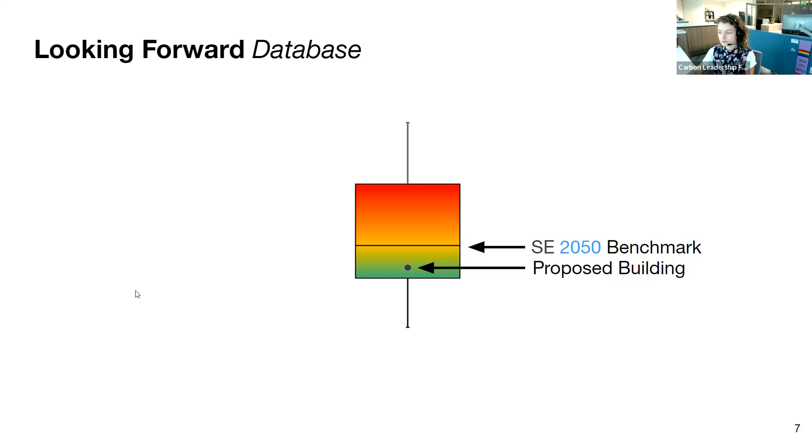As structural designers, we have an understanding of how factors such as seismic design category, soil bearing pressure, and risk category can influence the cost of a structure, but these factors also can impact embodied carbon. So to make a successful comparison, we need to be gathering all of this data. We also need to know how our buildings are performing to keep us on track for net zero. So as we start to accumulate more data, trends can start to be spotted.

For example, we can put together an ideal range of embodied carbon for timber versus concrete structures of the same scale. And before SE2050, there was no equivalent database that tracked structural embodied carbon or any of this information. And we're actively working to fill this void by collecting the data to better inform our industry in these critical next few decades.

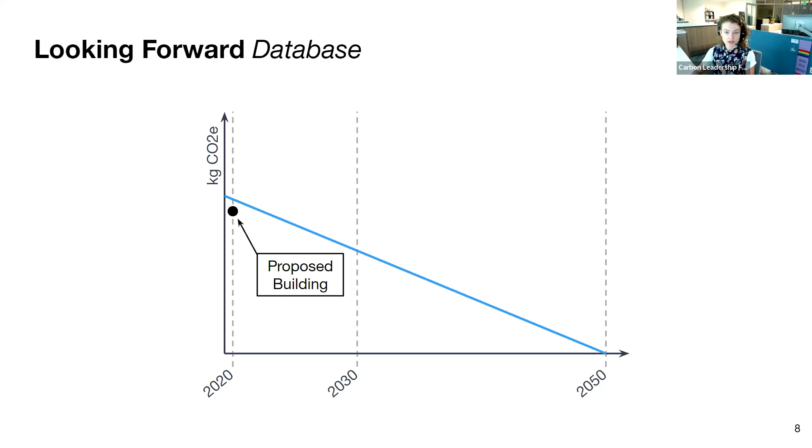So in conclusion, from the data that we've collected so far, it is too early to draw any conclusions from that data. There's a high amount of variability for two major reasons. First, there's variability because there's no LCA methodology standardization. And second, there's variability because even in similar buildings, we can have wildly different structural designs. And so our priority moving forward is collecting more high quality data, more data period, and creating a standardized LCA procedure.

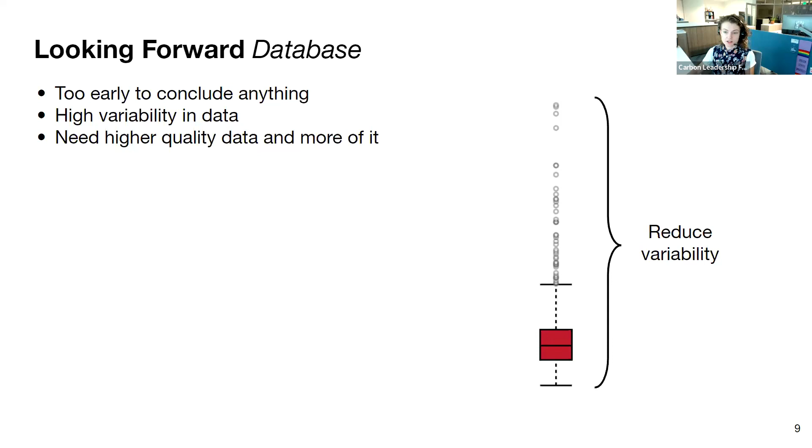In order to reach our goal by 2050, we need to start ramping those program requirements up. And this is going to be a challenging process. It's going to occur gradually, but we've been working to make this process as easy as possible for signatories. And this includes, we drafted a pathway to zero this past year, and we're going to be implementing those changes to our requirements in the near future, coupled with resources to support firms as they continue that journey.

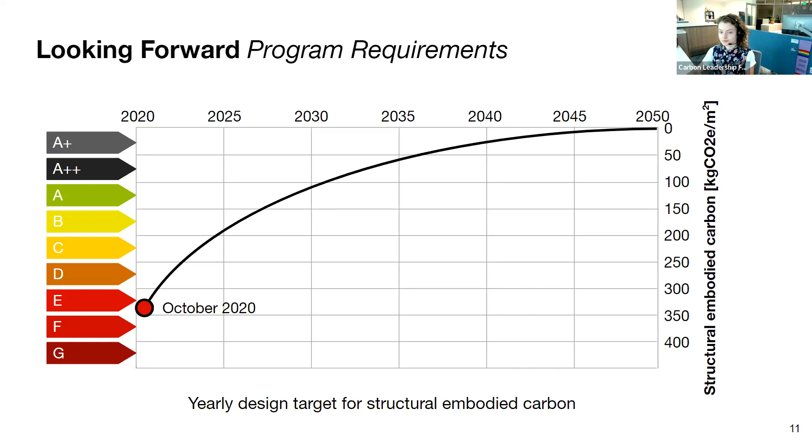And to close, I'm just going to go over looking forward, generally speaking, for the program as a whole. In January, we performed a detailed planning session as a team, and we determined that the following new programs are going to be incorporated into our work as a component of supporting the firms, as I was discussing under program mechanics. And this includes a recognition program to aid in the formation of a community by increasing the visibility and awareness of other firms that are working on the program with you, and through the creation of a little friendly competition. This also includes a mentorship program with the hope of facilitating communication, resource sharing, and general support between participants.

And then expanding educational outreach by doing seminars such as these, to be able to talk to people directly and answer their questions, as well as educational outreach in the form of different kinds of documents. Specifically, we identified the need for guidance on structural material quantities and LCA methodologies.

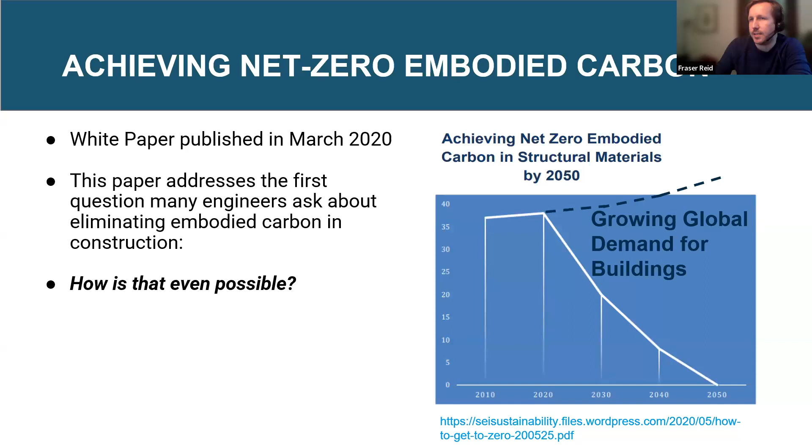So introduction: this is a white paper that's also available on the website, but as Annabelle explained, the mission of SE2050 is to provide a pathway towards net zero embodied carbon emissions in structures by 2050. And the most common question there is, how is that even possible? Because fundamentally, structures have a lot of materials. Current methods of manufacturing require extraction of virgin materials, and emissions are just part of the process. So how is this even possible? There's also a growing demand for buildings. So wherever we stand now is projected to increase over time.

But ultimately, so this is Mark Webster's white paper. Ultimately, there are 4 different tracks that are necessary to eliminate embodied carbon in structural systems. The first is the design track, and that's really what I'm focused on today, the way that we design structures. So being lean, reducing our demand for materials in the first place, is the first track. That's the blue one. Then the orange is basically a clean electrical grid. So how materials are manufactured, less reliance on fossil fuels, and more reliance on green energy and electrical production.

The third track is material production. So basically cleaning up the way that materials are produced, period. So there's all sorts of research going into different structural materials, concrete, steel, timber, from a material standpoint.

The SE2050 website does also have specification guidance for structural engineers. So once you've determined you need a certain amount of materials, how to manufacture the materials that you do need as carbon efficiently as possible. And then the last track is the offsets track. So carbon emissions are part of the game with material production. So basically reducing those insofar as possible and offsetting the remainder is really how to get there.

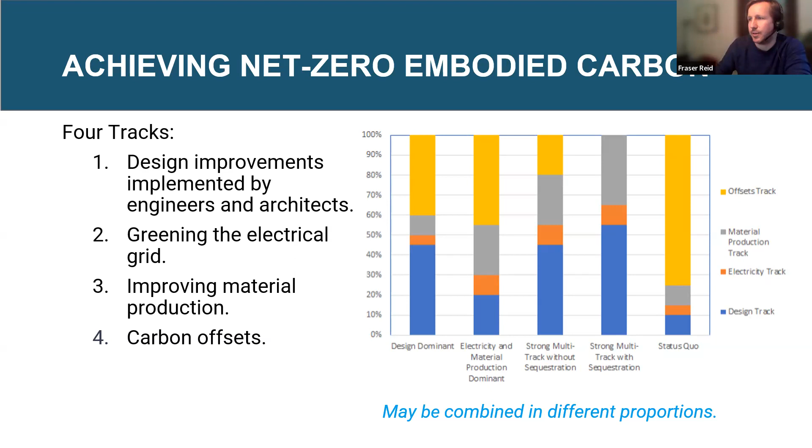Just back to SE2050, similar to what Annabel was describing. It's a two-way commitment, and our commitment to the industry is to provide the resources and support to the profession. So again, this is just a new resource that's available on the website. When you go to the SE2050 website, Swarna is actually one of our key people for organizing the website content. At the moment, there's a number of splash pages. The design guidance currently lives in the structural materials strategy, but this is being reorganized at the moment. But if you visit our website, this is what you will see.

And this is the new design guidance page, and I have a little video here that just shows you how it's organized. So it's a lot of written content at the moment, which I hope we can improve over time and maybe have more pictures and diagrams elaborating on the written content. So we're calling this design guidance volume 1.0 with the goal of improving it over time. And I'm very much an advocate for something is better than nothing.

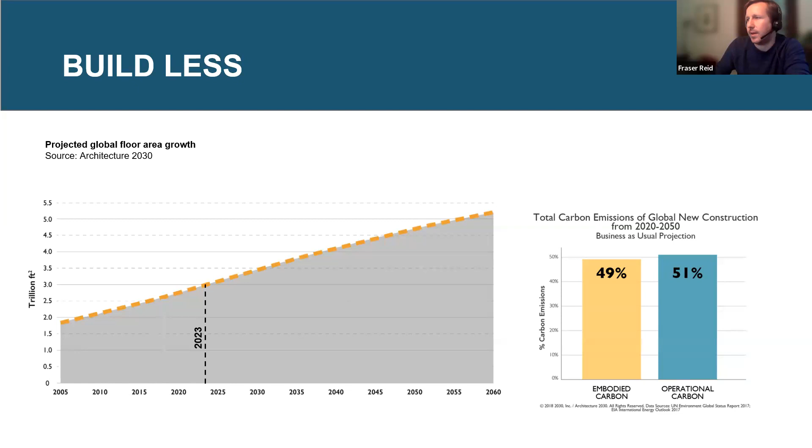This is projected global floor area growth that you may recognize, but we are building effectively a new New York City in the world every month for the next 30 years. That's just based on population growth and business as usual projections for new construction. And if you project embodied and operational emissions, embodied carbon through 2050 is projected to contribute approximately half of industry emissions. So a new New York City every month for the next 30 years. Let that sink in.

What's our role as designers? Very often we're given a brief and we feel kind of helpless to challenge that brief, but there are moments, and the more we as an industry advocate for building reuse, I think the more impact we can have collectively.

So what is the most impactful way we can build less? It's to use the existing built assets that already exist. Next time you're on a project and the brief is to demolish something that's already there and rebuild, challenge that decision.

It may range from something very small to something very large. In this instance, this is one of our projects in Detroit, which is an existing building. Sometimes these, I think this is an example of it—it's sort of a hypothetical comparison. Up top is basically a hypothetical scenario. In this instance, the client had no intention to demolish and rebuild the building, but I think it's important for illustrating the impact of building reuse.

These are carbon avoided assessments. There's also the CARE tool that was recently released, open source, that you may be familiar with, which aims to do this as well—to provide very high level carbon avoided assessments for retrofit scenarios.

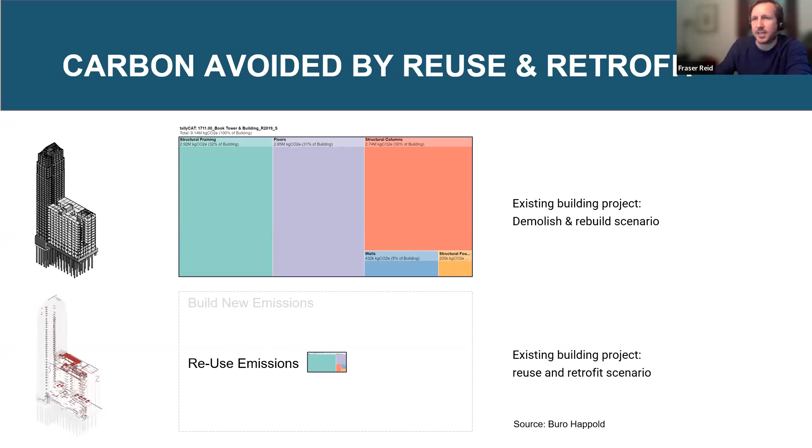And then below, it just shows you, with this particular project, from our Revit model, the interventions that were made to enable this building to be reused, and the embodied emissions just based on the amount of stuff that's required to get there—a fraction of the demolish and rebuild scenario. So presenting metrics like this in a simplistic and digestible way to clients, and doing this collectively in the industry, is important.

Build smart. So this is early on in design, and as this graph illustrates, the time-dependent nature of decisions. What are the decisions you're making right up front in the project? Well, I mentioned, do we build at all?

Can we reuse what's already there? The impact of that level of decision making just eclipses the impact you can have once these decisions have already been made. Once you've got to build new a certain amount of program and floor area, well, it's going to take a certain amount of embodied carbon to get there.

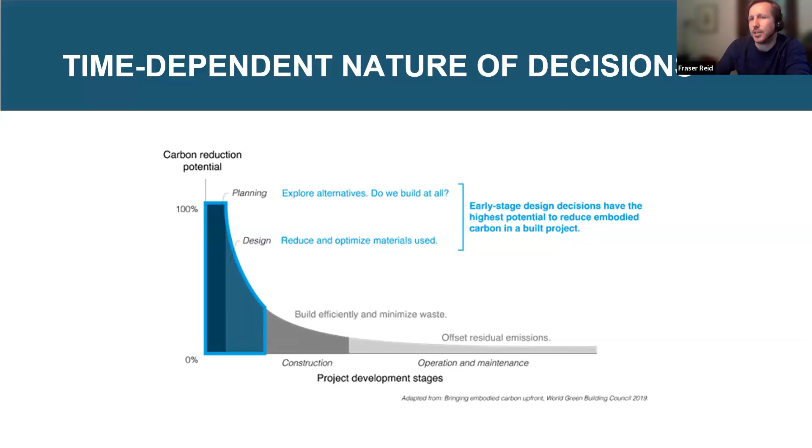But as I'll illustrate with some of these other early decision-making topics, there's a lot more you can do, should you recognize that new build is necessary for your project.

One of the most carbon intensive types of structures are deep basement structures. There's a lot of concrete that often goes in the ground in foundations and substructure. Basically, it's somewhat exponential—the deeper you go with basement structures, the bigger everything needs to get, based primarily on hydrostatic pressures.

It's linear with depth, and so there's a huge difference between a 3-story basement versus a 2, and again a huge difference between a 2 versus a 1.

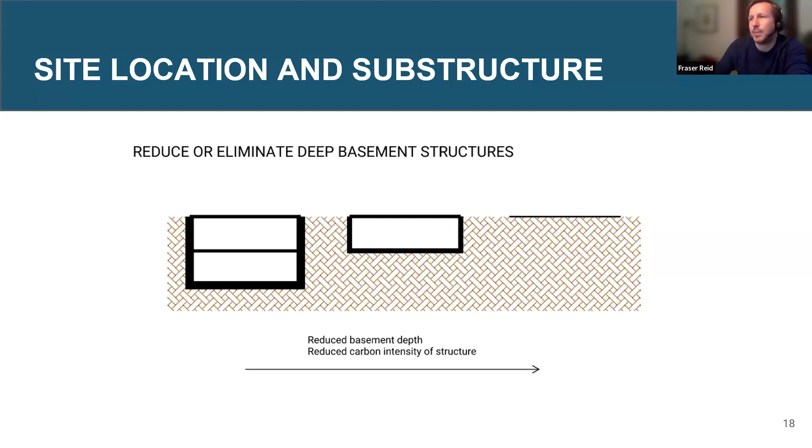So can we reduce or eliminate the need for deep basement structures? Think about this as value for money—but think about it as value for carbon. You're getting a certain amount of square footage at your B2 level, but you're paying so much more in carbon to get there. So think about where you put your building on your site, and whether the demand for basement structures can be reduced.

Ground floor advantage. So this is about where you're going to put your stuff. You've got a swimming pool that needs to go in the building, or a bunch of MRI machines or vibration sensitive equipment—where are you going to put that? Well, with the heavily loaded stuff, basically the lower you can put it in your building, the more efficient it's going to be for structure.

Obviously it's the columns that are supporting—imagine your rooftop swimming pool—it's your columns and vertical structure, but it's also a huge impact on your lateral system, which is basically all the stuff resisting earthquake loads, because heavy loads basically mean high earthquake loads. Your bracing, walls and foundations to support the building laterally can be reduced significantly by placing your heaviest loads near the bottom of the building.

With vibration sensitive equipment, basically, if you do have highly sensitive equipment, putting those directly on ground is the best way to go, because the structure required to elevate highly sensitive equipment just ends up being low value for carbon.

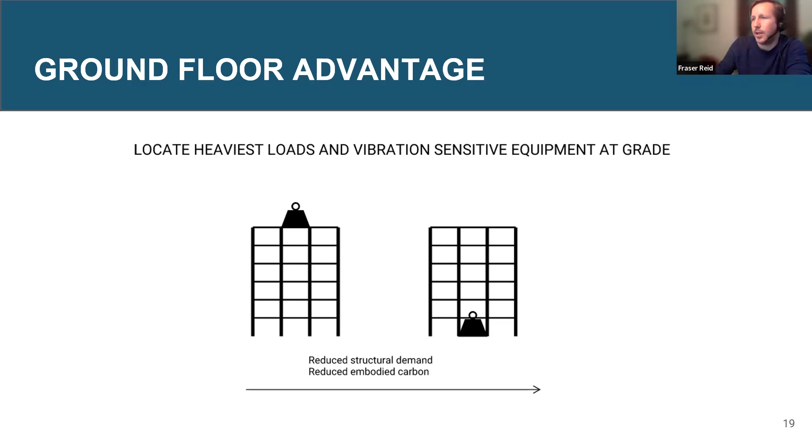Floor bay studies. So usually when you're working with your structural engineer, what you'll see coming out at SD stage is some initial bay studies. We're comparing different structural systems, we're comparing different materials. This is, again, getting this right early on in your project.

Carbon's really just another metric, right? We're used to comparing structural systems in terms of cost, constructability, speed of construction, all considerations that aren't going away and still are important to our clients, but using carbon as a metric to compare different structural systems as you're conducting bay studies. So conduct those bay studies, don't jump to conclusions during early design, and communicate the findings as it relates to carbon.

There's no one answer about always using this system. I think the key thing is to evaluate based on your expected span conditions, etc., different system options, and compare them in terms of embodied carbon.

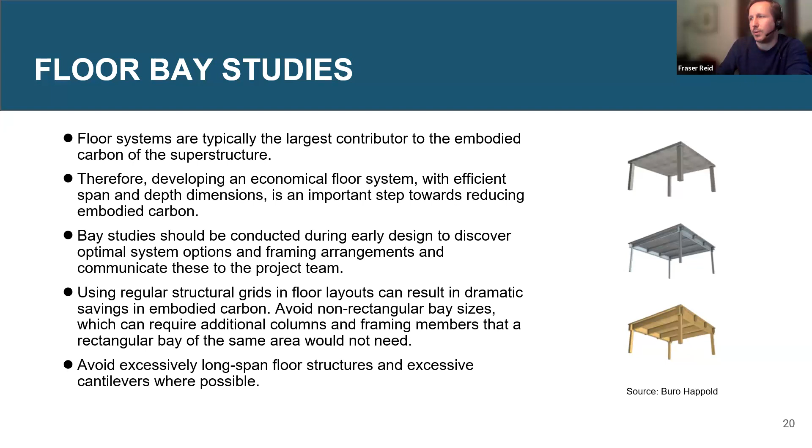As a rule of thumb, typically lower span dimensions will give you a reduced embodied carbon intensity of your structure. There's also other rules, like using regular structural grids and avoiding lots of irregular grids, and also avoiding excessively long spans. Long span structures are typically a lot more carbon intensive, same for excessive cantilevers. Small amounts of cantilevers can actually be fairly efficient for structure, typically up to about a quarter of the backspan dimension.

Consider composite and hybrid floor systems. Composite floors are traditionally concrete formed on steel framing, but composite floors can exist between any two materials. The reason composite floor systems are more carbon efficient than non-composite systems is the interconnectivity between the framing and the floor deck. Basically, they act together, and that helps you reduce the weight of your framing.

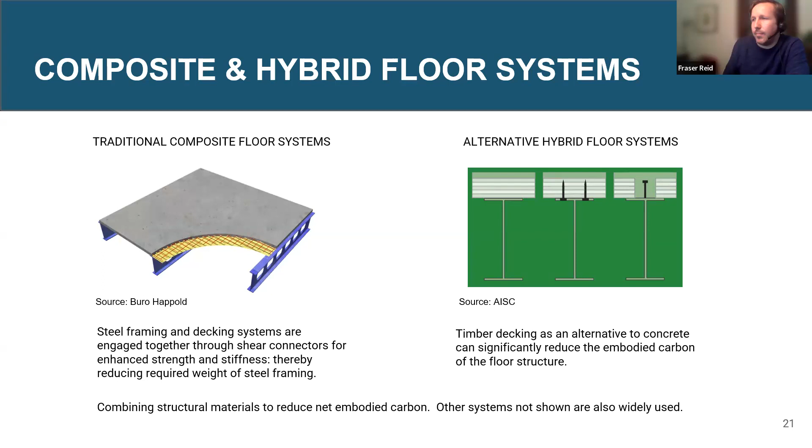Alternative hybrid floor systems - the American Institute of Steel Construction just released a new design guide for hybrid timber floor systems on steel framing. There's so much carbon typically locked up into the floor deck of structures, that if we can use timber as an alternate to concrete for floor systems, then we can go a long way to reducing embodied carbon of structure.

Prefabrication and offsite construction. As when you see some of these design guidance items, when you're conducting your life cycle assessment and you're really evaluating how much material do I have, and what's the carbon factor from the EPD that I'm using to get to the whole carbon value.

This is an example of where you don't necessarily get the reward for using a higher level of prefabrication, because typically it's a similar amount of stuff, but the benefits of prefabrication are some of the hidden benefits, because the processing of these materials - the more you can construct in factories, the less site waste you have.

Sorry, where I am, there's a thunderstorm happening, so apologies if I get cut off.

So prefabrication, lots of benefits - reducing waste, just less demand for materials, lower site emissions, and also more easily deconstructible, as well as other benefits to contractors and owners, like higher levels of tolerance and faster construction.

This particular system is a CREE system, which is prefabricated timber. You see there, the columns are constructed as part of the facade panel, so it's all kind of one piece. This is a system that we've used in our Europe offices that we're trying to bring over to the States.

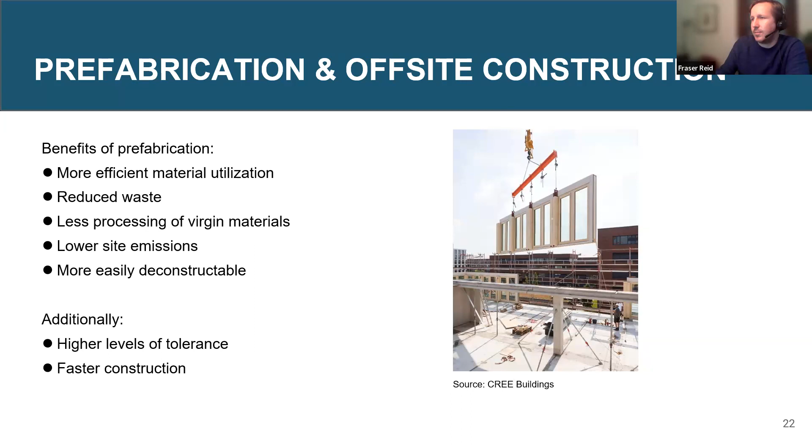Some recommendations as it relates to coordination. Avoiding - you're not always able to eliminate these types of things, but at least considering them during design and recognizing the carbon impact of some of these, so inefficient load paths, staggered column plans requiring lots of transfers, for multi-story buildings.

This is sort of good design practice illustrating that you can reduce embodied carbon through good design practice. So orienting your cores and considering how your MEP services are getting in and out, so you don't need to kind of brute force your lateral system.

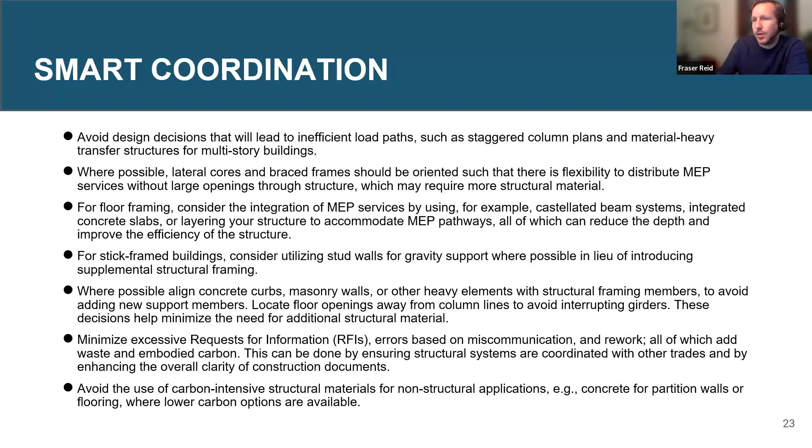For floor framing, castellated - integrating your MEP into your floor framing gives you additional depth on structure, so you can be more efficient with structure and more efficient overall. If you've got a stick-built system, not just using your stick-built elements for walls, but also utilizing them for gravity support, and some other suggestions there.

Now getting into some maybe nerdier structural topics - this is guidance for the processes we typically go through as structural engineers to address these topics, because ultimately we have minimum code requirements which need to be met.

But more often than not, there are also other considerations that go into how we design and size structural members.

Evaluate your loading criteria, using minimum code requirements where you can. Often on projects there are custom loads stipulated by the client - for example, wanting a 250 PSF lab floor so they can put heavy lab equipment wherever they want in the future.

So interrogate those criteria, because it really is pretty linear. If you've got a 250 PSF live load versus a 50 PSF live load, you still have other structural loads to consider, but you're going to need 3 or 4 times as much structure to get there.

So communicate that to your client and help them understand the impact of custom loading requirements as it relates to carbon.

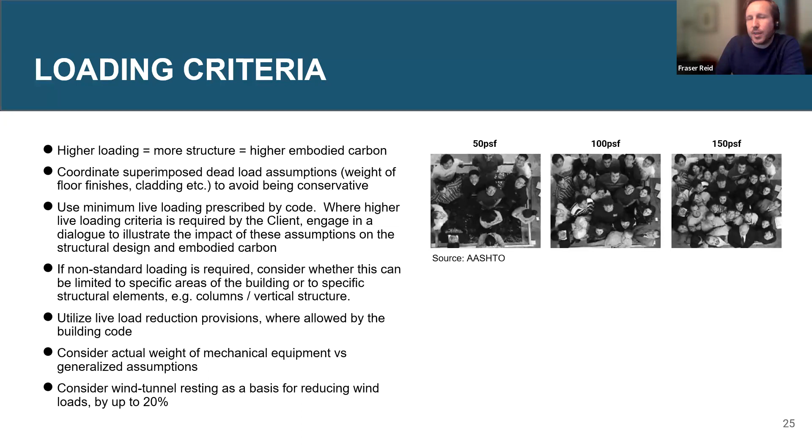In the same vein, serviceability criteria - structural engineering 101, serviceability is everything other than strength. Strength is life safety: structures are designed for a suitably low risk of failure, meaning they don't fail under the prescribed structural loads.

But more often than not, what actually controls design are your non-strength-based criteria - how much will it deflect, what is the vibration performance, and will people be comfortable in the space?

The building code provides limits we have to use for serviceability. It's really important that when it comes to serviceability, engineers are realistic with these criteria, not prescribing unrealistic serviceability limits.

It also comes down to the modeling of structural models, which often have assumptions built in - just be cognizant of all of those.

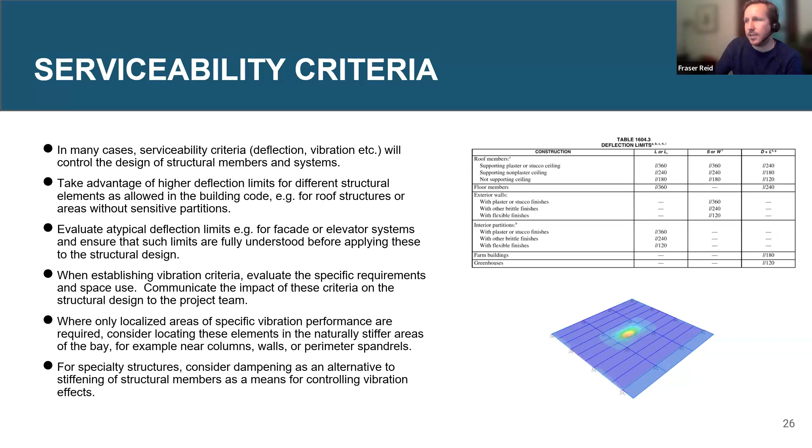But they don't want to pay to get there, and using carbon as an additional means of dialogue to address these topics is really key - engaging in that conversation.

Maximize design utilization. To a certain extent, I'm sure we'll give this presentation and get fairly consistent feedback - 'well, this is just doing your job' - and you might say the same for the previous couple of slides.

But IStructE have published papers indicating that structures designed and constructed in situ typically perform at around 0.8 of their actual capacity - meaning we're leaving about 20% in the tank. In some cases, design utilization is even lower.

There are many reasons why this happens through the structural design process. It's important to be aware of those reasons and to set a culture in the industry of reducing layers of conservatism that lead to design utilization well below 1.0.

An example of that is rationalization instead of optimization - meaning you have a whole bay of beams that are all similar but slightly different, so you design for the worst case and use the same beam size for all the others. In doing that, you might have beams that range from fully utilized down to 70 or 60%.

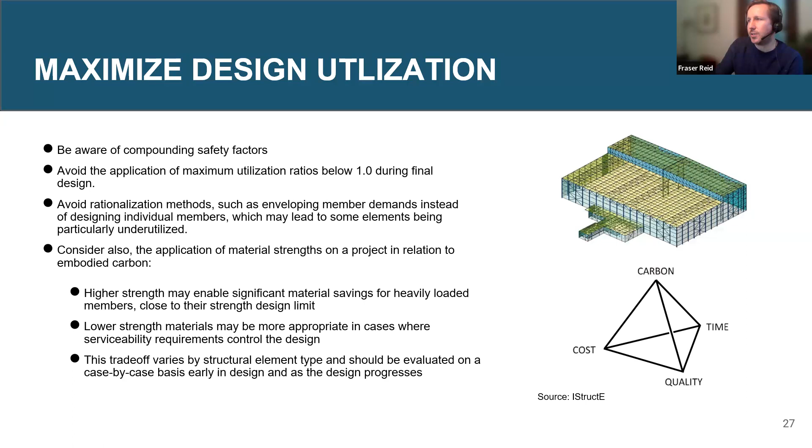And it's just adding another consideration: what about the carbon impact of the processes we're using and the decisions we're making? We have software available now as structural engineers that can make it a lot easier to design, with computer models, structures that are, with the same amount of time, less rationalized and more optimized.

Shape optimization is where you're actually varying the size of your members along their length to where the demand is. And in a similar vein, topology optimization, if you have a truss structure or bridge structure or something of large scale, this method is often used, and it can be computer simulated these days to help you understand what depth is needed and what the optimal configuration of your structure is. So, different types of optimization.

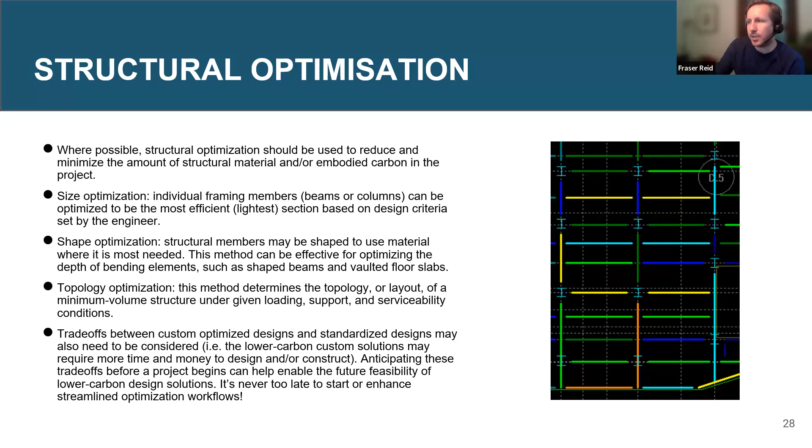And again, there's trade-offs, and anticipating these trade-offs and recognizing carbon as an equal design consideration to cost and constructability and all these other things that we're used to talking about.

Implementing circular design principles. I'm sure you're all familiar with the definition of the circular economy, but basically avoiding the linear process that the industry is currently, for the most part, set up with, where we take stuff out of the ground, we use it, and then we put it in landfill, or where we're able to, we recycle some of those materials.

So, for instance, a lot of steel material is recycled. That's a good example of closing the loop there, and that's what we're talking about with the circular economy: in the same way we're used to recycling our garbage and reusing something before it even becomes garbage, treating building materials in the same way.

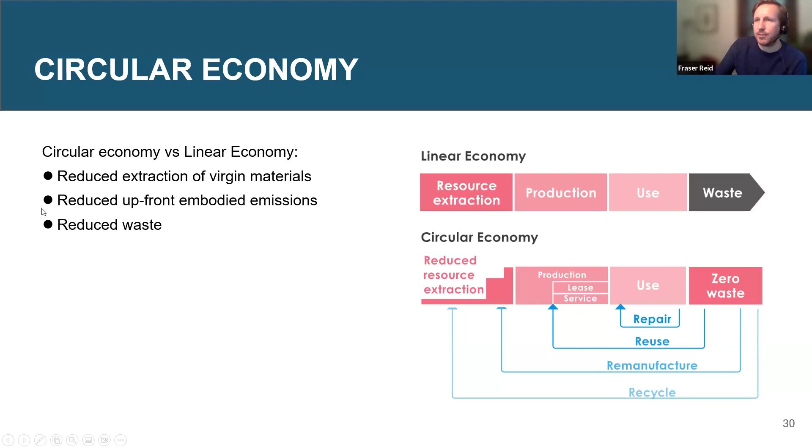So what are the benefits? Well, reduced extraction of virgin materials, reduced upfront emissions, and reduced waste. But what can we do now is really the question. With structures, some of these are challenging at the moment because the industry is not set up to do some of this at scale. But we influence demand, right?

So if we as designers are advocating and seeking opportunities to incorporate salvage materials onto our projects, we have the ability to drive demand in the market at large. So salvage materials, there's really no reason we can't be reusing a lot of structural elements that are typically, as buildings are demolished...

There's a push for deconstruction versus demolition, and certain cities and states are adopting deconstruction policy. There's really no reason, if we take buildings apart carefully, that many structural members can't be reused elsewhere. So that's obviously a lower emission process than having to, with steel for instance, melt it back down and recycle it.

So if your project has an existing building that needs to be removed, that presents an opportunity to talk with your client about finding that sweet spot. Can I reduce your cost as well as reduce your environmental impact if we can reuse some of the materials that are there for you already? Supply chains don't, you know, they exist to a small extent, but not at scale for salvaged materials. But specifying these can help change that.

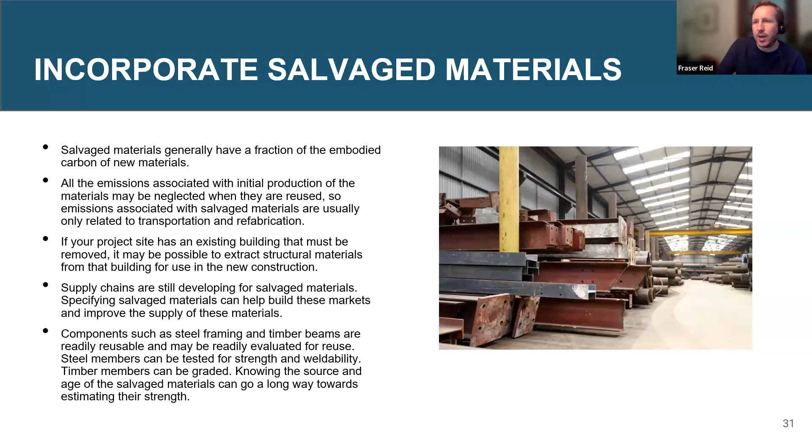So think about steel framing and timber beams. They're commonly and quite easily tested for strength and weldability, so they can be reused fairly easily.

Design for adaptability and deconstruction. Maybe you don't get the benefit in your life cycle assessment now, but what you're doing is enabling someone down the road to take your building more easily apart and reuse the components that you've used. So it's reducing future economic incentives to demolish a building.

So what can we do now? Again, is the question. I want real advice. What can I do now? Well, in some ways, it's actually really basic stuff. So ensuring really good record information, so that basically your bill of materials that exists within your project, it's easy in future for someone down the road to interpret those and identify what can be reused.

Simplifying connections so that you can take them apart more easily, using standardized elements and grids. Eliminating secondary finishes, we're not suddenly encasing everything in concrete so that it's impossible to reuse it. In a similar vein, dry connections, so bolted type connections, mechanical fasteners, instead of welds and adhesives that are a barrier in future to deconstructing. Modular construction can improve this.

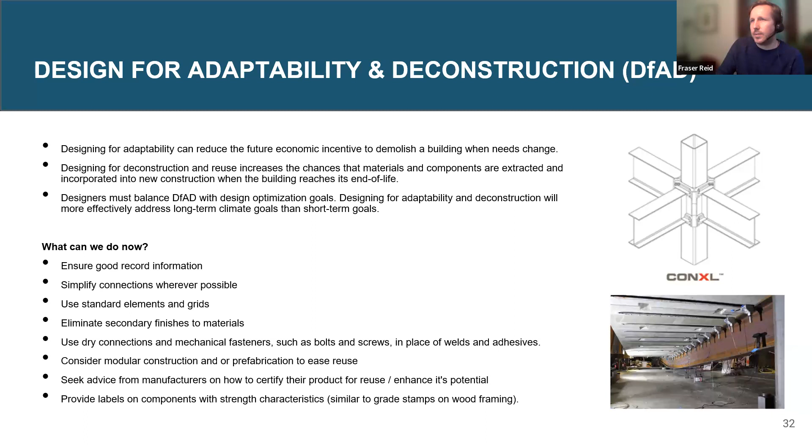And then typically if we're doing composite design, I talked about composite design earlier and the benefits of it, but typically that's achieved with welded shear studs that are then cast in place with the concrete. Well, you can't deconstruct that. So this is an example of a clamped system that, again, achieves the connectivity between the two materials that's needed in order for them to behave compositely, doing it in a way that's more easily deconstructible. So I hope that we really see a lot of change in the industry around adaptability and deconstruction going forward.

They can really help you determine how to get the most out of steel and how to be efficient. There's different grades and strengths of steel available, so using those in a conscious way. Load optimized members, so putting the depth and the stiffness and the strength where it's really needed. Castellated beams, that's a very low waste method to increase depth of structure and integrate structure with mechanical services. Utilizing camber.

Camber is basically where you bend all your beams upwards before you use them, and this is an example of if serviceability, deflection performance, is controlling the design. Well, adding camber doesn't add any more material, and it can take out some of that initial deflection and save you a lot of weight on structural framing down the line.

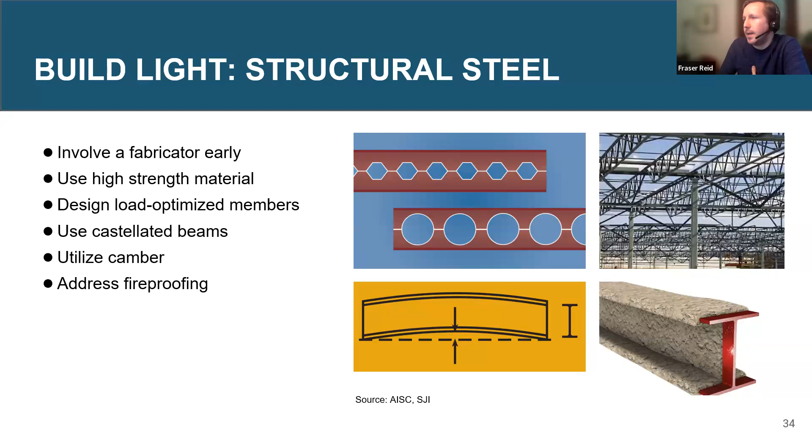But with steel framing, usually fireproofing is a cementitious spray that is pretty carbon intensive, so consider the impact of the fireproofing in your decision making when you're selecting your structural system. There are much lower carbon alternates to cementitious fireproofing. So consider those and just consider it as part of your decision making process.

Build light with concrete. This is about being basically as material efficient as you can with a concrete structure. So there's various systems available, but before you even get there, the simple message is not all concrete is made equal. So carefully consider your concrete strength and mix selection. Basically, the vast majority of embodied carbon emissions for concrete come from cement production, sort of 90%. Higher strength concrete mixes require higher portions of cement and are therefore higher in embodied carbon.

And then if you consider cement replacement materials, which is less about design guidance and more about how you specify your concrete, you can have concrete mixes that vary enormously in their embodied carbon impact. So not all concrete is made equal. And then with your actual system selection, really the best place to focus on with concrete frame buildings is the floor system.

Concrete is a heavy material, and therefore when you have longer span floor systems, just the weight of the structure itself can often be higher than your live load requirement, which is all your people and everything that your structure is actually supporting. That doesn't weigh as much as the structure itself because concrete is so heavy.

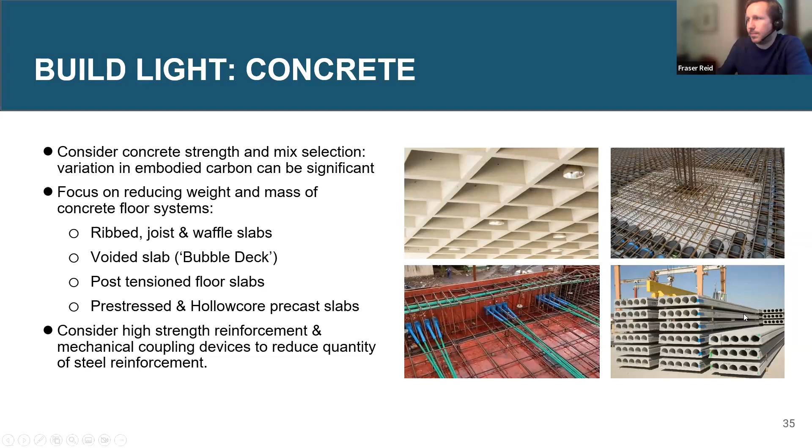With wood, not a lot to say about wood, but wood is obviously very different to steel and concrete because it's a naturally occurring material, and there's carbon that is sequestered. But this slide is really, if you're using wood, how to use wood as efficiently as you can, because carbon sequestration can basically give you the impression that if I construct a wood building, I've chopped down a bunch of trees, but look at all the carbon that's been sequestered, hey, my building is carbon negative now because I've used more and more trees.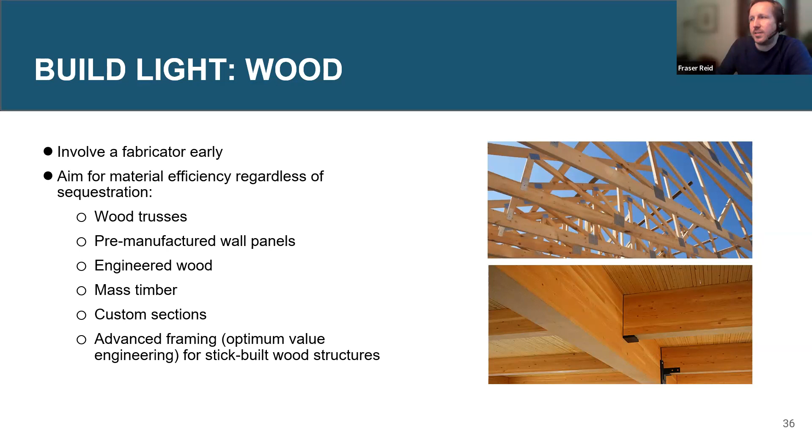While the message on wood is still: using less wood is better. So regardless of your sequestration, just use systems that use less materials. So with wood, again, similar to other materials, lighter weight, deeper systems. And then there's other recommendations on the website with some of these other systems. I think I'm probably at risk of taking too long.

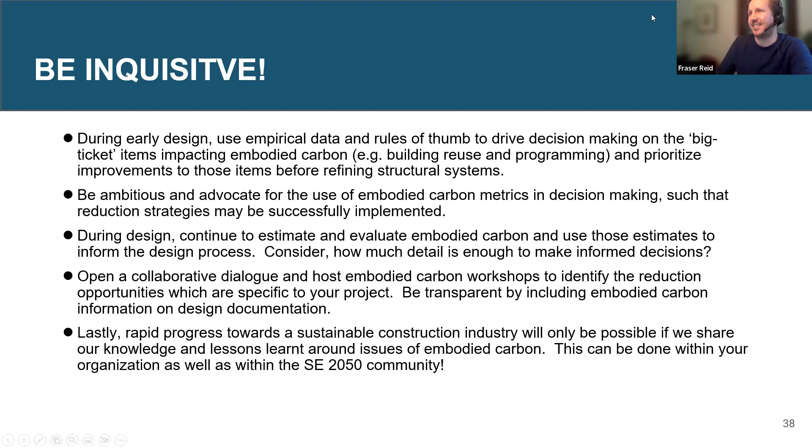I thought it was great, Fraser. Thanks. There is a lot of information, but I think that's good. I think it probably works for folks on this call for sure. And I appreciate the structural engineering direction of that, and with structural engineers I've worked with, these discussions would be hugely helpful. Not that folks don't know it, but being reminded of exactly that, just being inquisitive about everything we're doing. And we preach the same thing on the architectural side as well. So just digging as deep as we can on this stuff.

We started a little bit late, so the timing's about perfect here. I know we're a little bit over, but I don't know if anyone had any questions. Annabel, are you still here? Are you one of the CLFs here? You are, great. I'm here. Okay. Hello. Okay, excellent. Sorry, I couldn't remember. You are a CLF. We have multiple CLF sign-ins here. So any questions from anyone? I think we heard a lot, but anything generated?